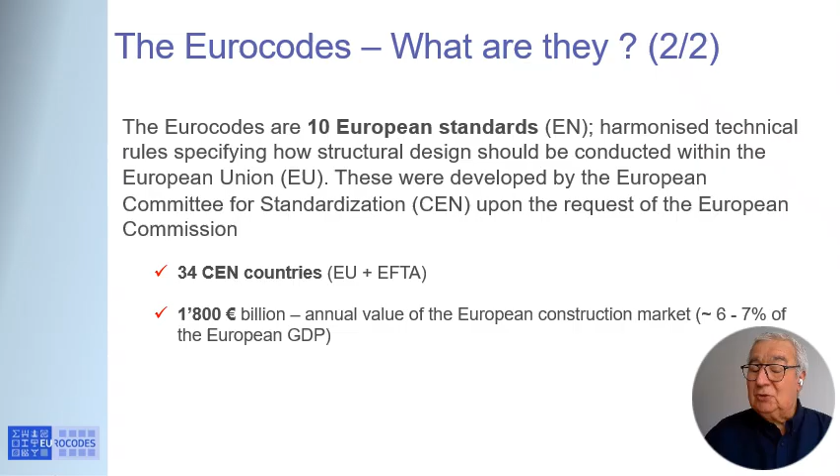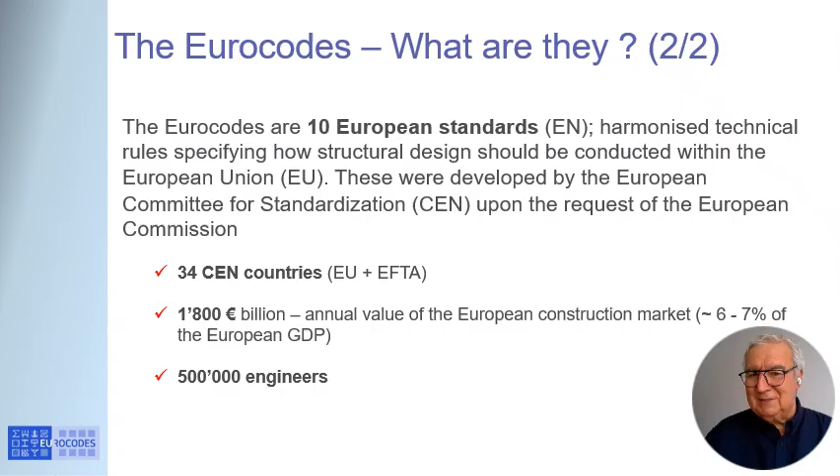There is 1.8 trillion annual value of the European construction market, which is 6-7% of the European GDP, gross domestic product, and there are, this is very important for us, 500,000 engineers involved with the Eurocodes.

If you go to be more structured, here you have the 10 standards. The first one is the structural safety, basis of design, where you deal with structural safety, serviceability, and durability of structures.

We go to the second level, which is the actions on structures. The loading standard is EN 1991.

After that you have a set of material codes, and it goes from concrete, steel, concrete composite structures, timber, masonry, and aluminium. These are the standards for design and detailing of these materials.

And finally, you have two more codes. One is for geotechnical design, which is 1997, and the Eurocode for seismic design, this one, which is 1998. This completes the set of these 10 standards, the Eurocodes, and yes, that's all.

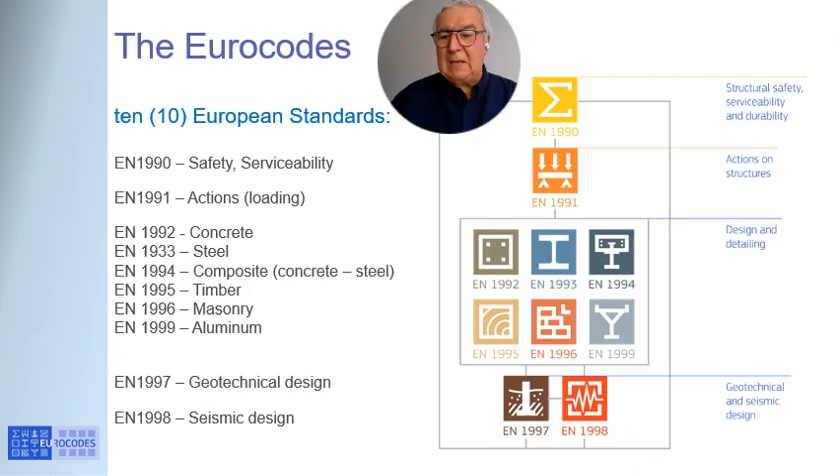Let me show you a little bit of this problem of applying a code in a vast region. I mean, how can you apply the Eurocodes in Europe? In the north, you have snow, too much snow. In the south, it's very hot, the temperature is very high. Africa is there, there are strong winds in one part, the others not too much. How can you cope with this diversity in terms of geography, in terms of climate, and in terms of geological conditions? In the north there are not too many earthquakes.

In the south, there are. Greece, Italy, Portugal, you see, there are earthquakes a lot. And how do you cope with the difference in seismicity in the different parts of Europe.

The solution was very intelligent, very clever in my opinion. It was to create these nationally determined parameters, which can adjust the conditions of the countries of the region. And we put all this together in the so-called national annex. Each country has a national annex for the Eurocode, for each code, and it goes like this.

Another important aspect is that the Eurocodes have a modular structure. You have seen these 10 standards very well separated. This modularity gives the possibility for the installation or adoption of the Eurocodes progressively. This is a very important thing also, the possibility of implementing even parts of the standard very progressively.

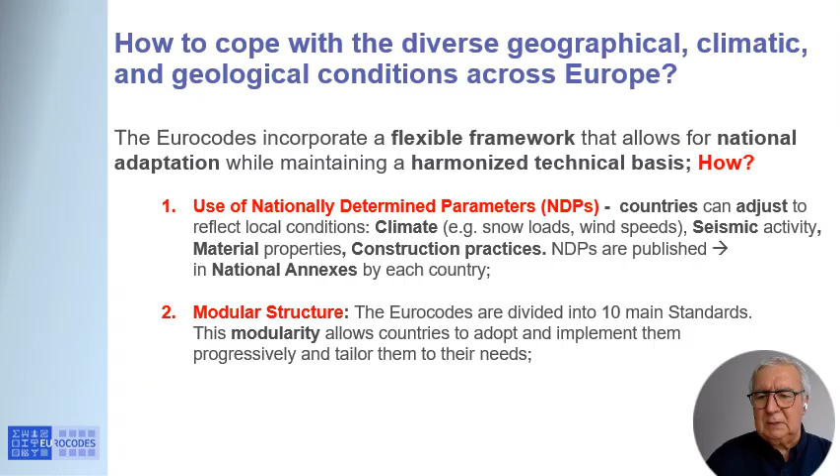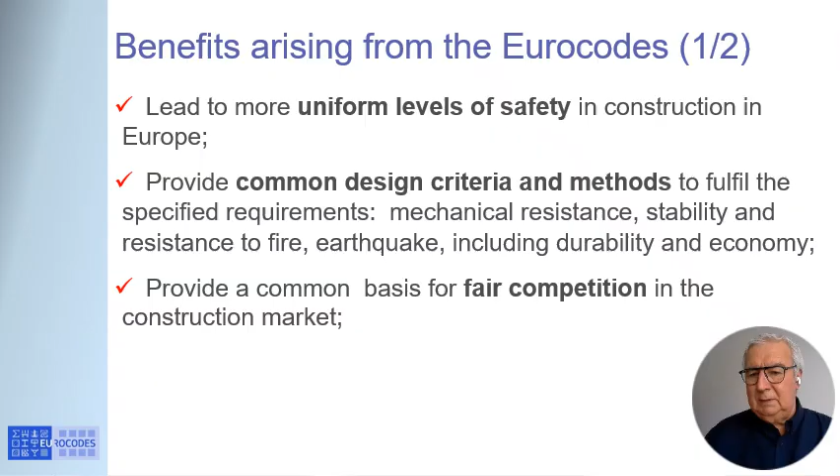Arising from the Eurocodes, uniform levels of safety in Europe. This is very important: common criteria, design criteria and methods, for design, for fire, for earthquake, durability and economy, and they create a basis for fair competition between the different firms in Europe in the construction market.

We could really be more specific here. Competitiveness between whom? Between engineering firms, contractors, designers, manufacturers, product manufacturers in their worldwide activities also, not only in Europe. And another important thing is that they provide the common basis for research and development.

Nowadays a project in Europe, if it is in this area, has a reference to the Eurocodes. This will have an impact in the Eurocodes in the second generation or even in the third generation. We have to have a vision always to put the results of the research into code practice, in a short or even long term.

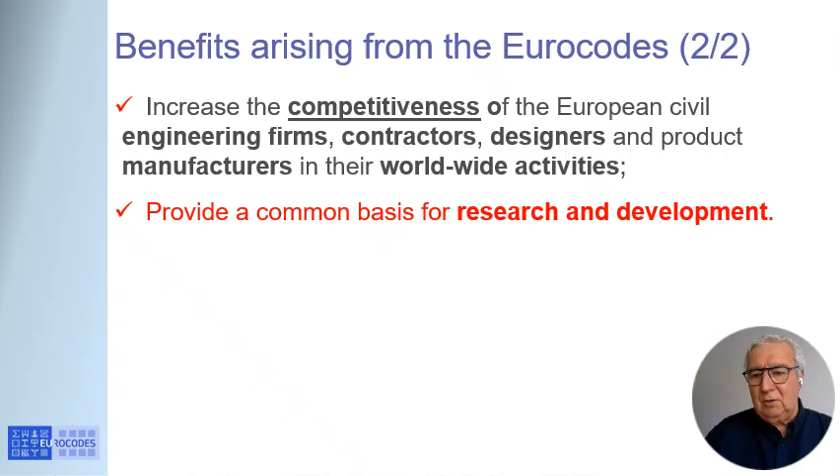Let me go to the second point of my presentation, about the European legislation and standardization system. Here you have the representation of the ecosystem for legislation and standardization. It's a bit complex, but I will try to simplify it.

Let us start with the legislation, the part of authority. You have the European Commission on top, the European government, and in the left column you have the European member states. They get together and sit in the Standing Committee on Construction, and they decide what are the objectives of the legislation, what kind of legislation is needed at the European level, and afterwards coordinate with the countries how to implement this legislation at the national level.

This is the authority, the legislation part, and afterwards comes the second block, this green one, which develops the standards, develops the codes. This is the CEN that coordinates this part. CEN is the European Standardization Body, and together with them all the national standardization bodies, as you see here in the column.

They communicate this legislation—this standardization communicates with the legislation. There is a channel of communication, and at the top you see these arrows. There is a very official communication: the Commission asks for standards, the CEN develops them and comes back saying if it corresponds to the requirements.

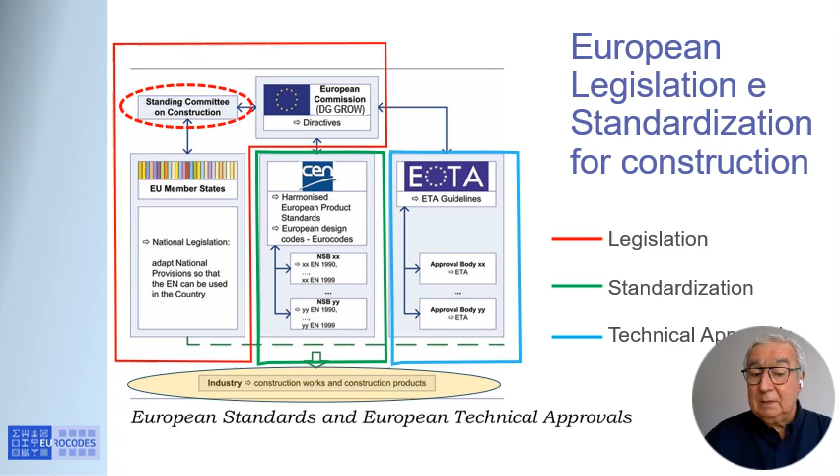Who benefits from this? The European industry. This is clear. There is the benefit of this system here.

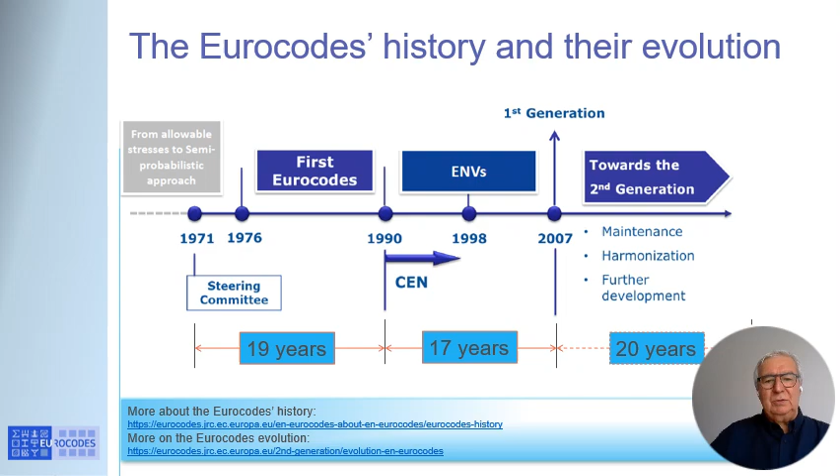Information about the Eurocodes, the history and evolution, etc., can be found on these platforms. Let us go to the duties of this implementation.

This could be useful also for you, for the model code. After its development, we have to transfer it to the national codes. There was a period of 2 years for the countries to set down their national determined parameters. There is a need to publish the national standard transposing the European part and national annex, clearly. There was the need to adapt the national provisions in order to allow the application of the Eurocode in their territory, and afterwards there is the need to withdraw all conflicting national standards.

You see there, March 2010 for the first generation was this date, and afterwards you need to promote the codes and training community in the application of the codes.

The Joint Research Center of the European Commission has been mandated to help in this operation: develop and collect manuals, design aids, support national implementation, international promotion, development, and coordination of research for the second generation. We started there, and at that time created the website for the Eurocodes, Eurocodes Building the Future, which is still there, perhaps with another design, but it's still there.

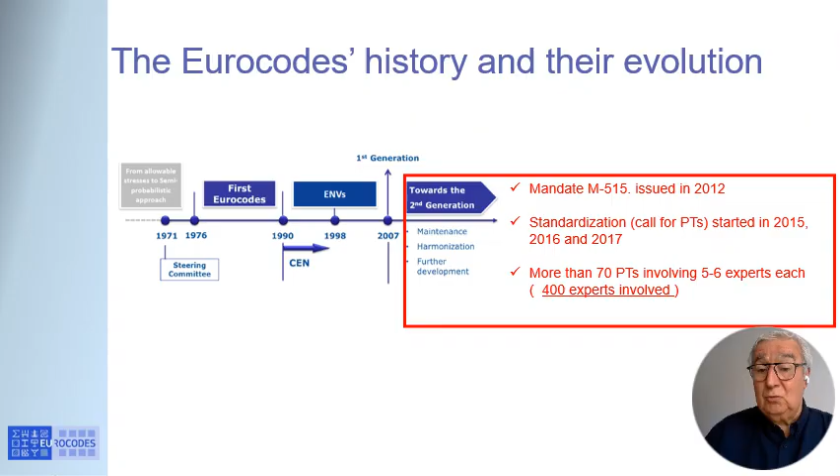The work started in 2015, and there were more than 400 experts, European and even external, not European, involved in this work. We are now in 2026, and the second generation is already there, published in Brussels centrally, and now the countries will have 2 years, till 2028, for the application. That is the date of withdrawal: they have to withdraw the old version of the Eurocodes in 2028 and adopt the new version.

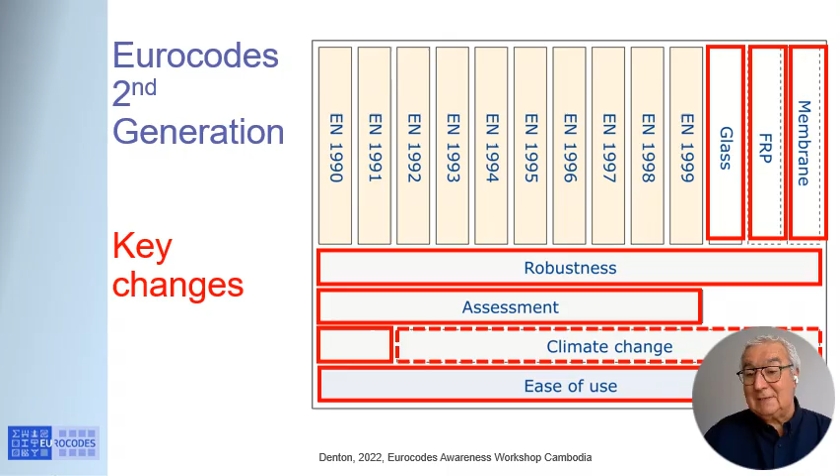What has been done in general: it has considered robustness, assessment of existing structures, climate change, and ease of use. You know, when you start a standard, sometimes you have the wish to include everything, and it's not the best way for design. We have also considered new material codes for glass, fiber reinforced polymers (FRP), and membrane structures, and at the end of the day, you have to uptake the new knowledge and technological developments.

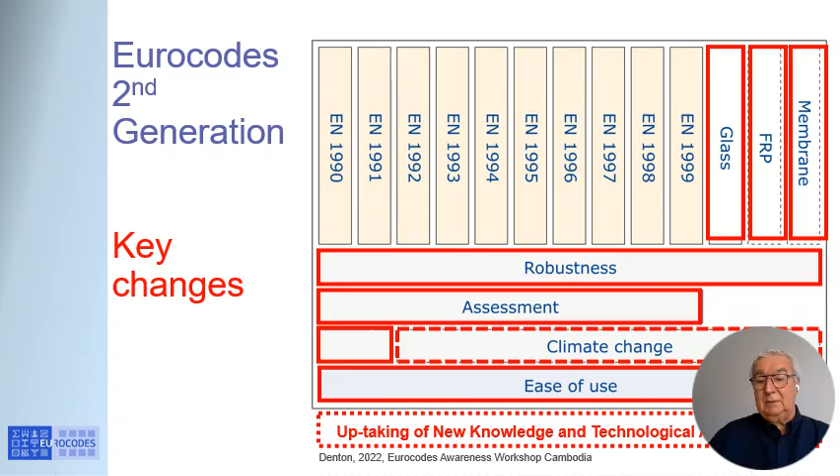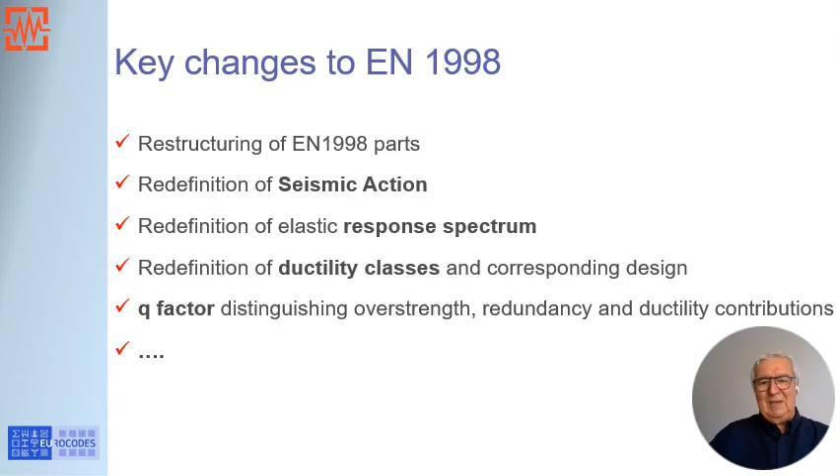This is what concerns the second generation. Let me come down more specifically to Eurocode 8, and here is what has been done for Eurocode 8 in the second generation. Very rapidly: restructuring of the parts, redefinition of the seismic action, redefinition of the elastic response spectrum, redefinition of the ductility classes and corresponding design, and also the q factor, which is the strength reduction factor. There are some important modifications there.

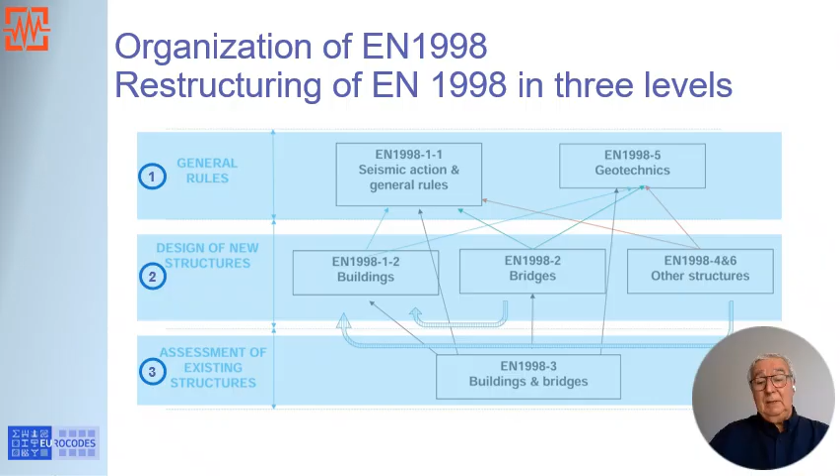The restructuring gave rise to this schematic representation where you have general rules, rules for new structures, and Part 3, for assessment of existing structures and redesign.

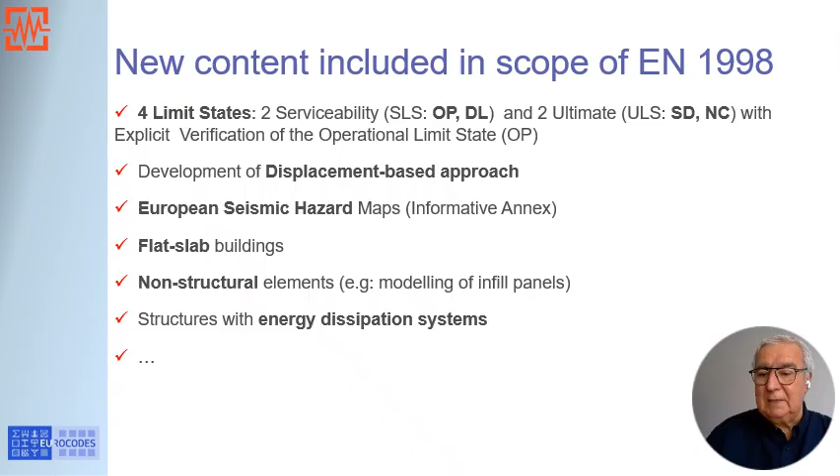Let me come to the seismic action, because here there was a modification. Nowadays the spectrum is defined with two anchored points: one is the spectral value at maximum amplification, S alpha, and the other is S beta, which is the spectral amplification at 1 second. 1 second is another anchored point because it marks the transition between flexible structures and more rigid structures.

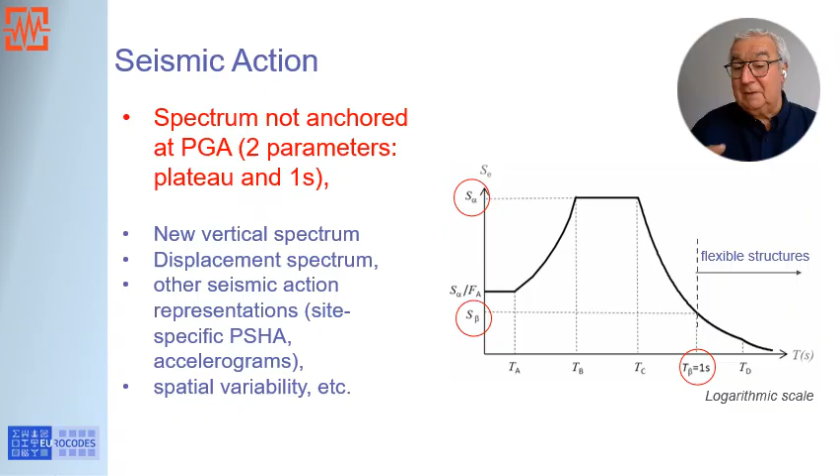This is the representation in a logarithm scale, but here with these 3 data points, we can define the response spectra, with the corner periods TA, TB, TC, TD, which come out as a nationally determined parameter. Countries can adapt this code to the region, touching even the corner periods in the response spectrum.

Here you have the maps of the S alpha values for a return period of 475 years, which corresponds to 10% exceedance probability in 50 years. This is the normal life considered for in Europe, and this was obtained within a project, the SERA project, financed by the European Commission. The Commission finances a project which is relevant for the Eurocodes.

And here you have the outcome, S alpha and also S beta, for all Europe.

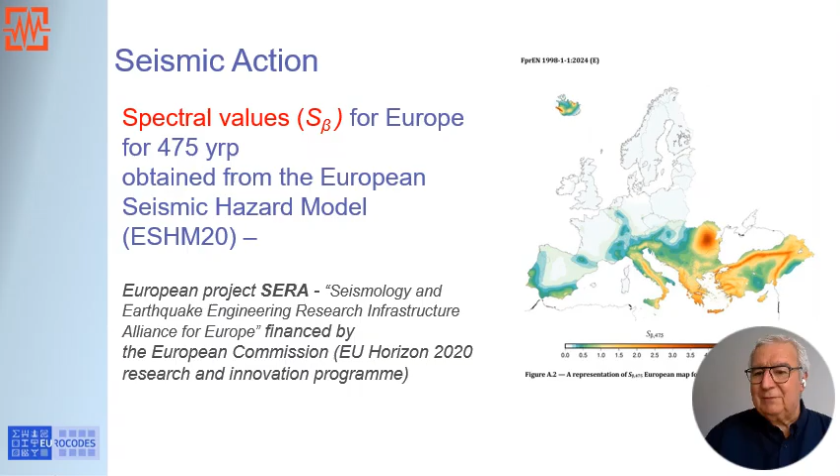There is another point, which is the consideration of seismic action classes. In the second generation, we take into account not only the seismic intensity, but also the consequence classes, the type of structure that we are designing.

With that, we define classes of structures, which are a little bit dynamic in terms. They change with the importance class, since we already consider in the seismic action the importance of the structure when defining these seismic classes. This helps in concentrating your efforts in where you should concentrate. If the structure is located in a high seismic action class, it should be important, the structure, and also the seismic intensity is important.

Pay attention to these structures, and if you are in a zone where the seismic action is very low, the structure is not important, don't worry about importance, and perhaps you don't need to have a seismic design of this structure.

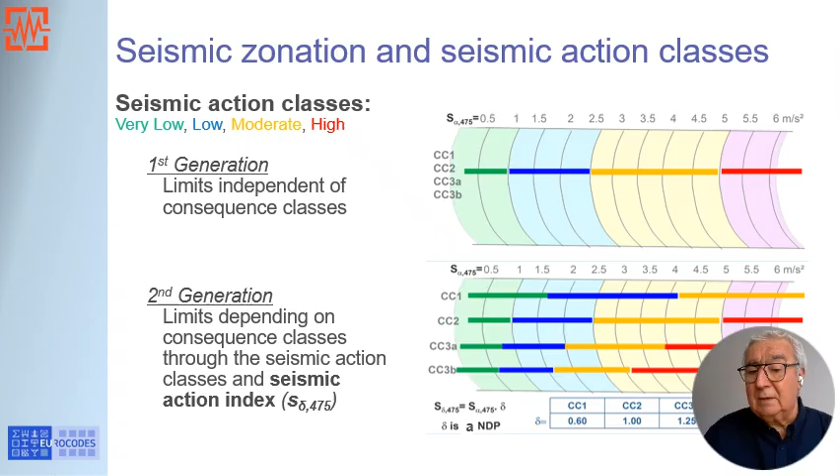Important thing is ductility class, they were changed, but one thing that is important to underline here is that we have reduced the strength reduction factors, the Q factors.

Why? Because of this damage limitation. We have seen in the earthquakes in the past, Northridge, Kobe, etc., that most of the new buildings stayed there, they didn't collapse, but they were completely damaged, they had to be demolished. The intensity of the non-linear deformation is too much, and they have to be demolished. This has consequences, economical, social, etc.

The tendency here is to reduce the Q factor, to explore less ductility, to have stronger structures in order to explore less ductility.

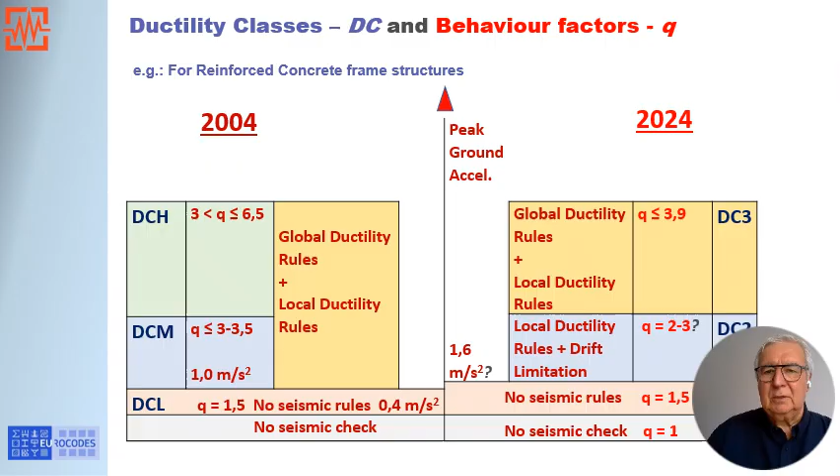Here you have the four limit states, the verifications, the performance-based design. For performance-based design: operational limit state, damage limitation. Here you have the famous damage limitation.

The significant damage, and this is the point that is the ultimate limit state for new structures.

And you have also the non-collapse, which serves essentially for existing structures. For existing structures, you should go to the non-collapse limit state.

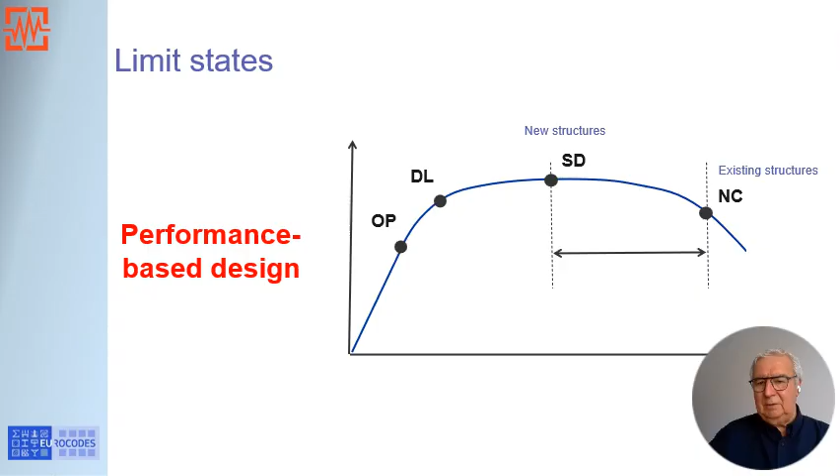The matrix is here, the performance-based design objectives matrix, and you see here the relation between the performance level, the seismic intensity level, and the performance level for the Eurocodes presently.

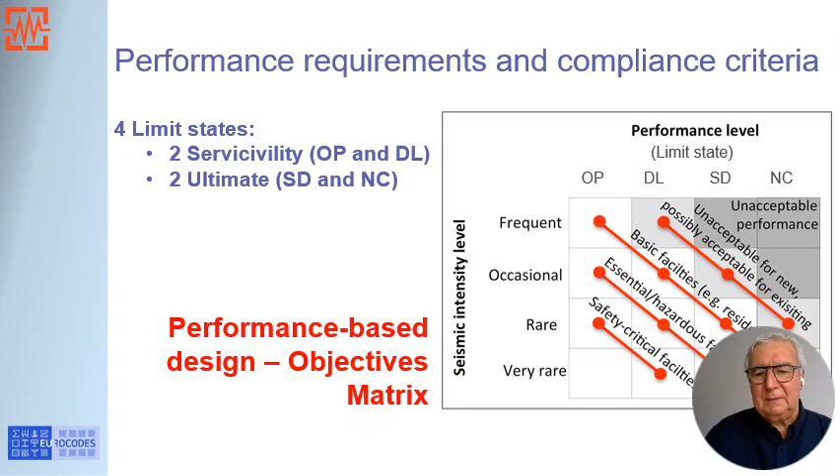The second generation is there, and what you have seen is that we have seen an engagement even of the European Association for Earthquake Engineering, in this case for Eurocode 8.

They have created webinars on the new Eurocode 8, the second generation. This is open information you can access, and there is everything about the second generation that you can see on the website here.

Research and innovation, and I'm in the last part of my presentation to show you how this development of the Eurocodes gave rise to lots of work, lots of research in Europe, and brought the research community together. This is very important because we have created an objective. Everybody is looking at the European standard and referring to it. This creates some momentum even in the research community and in the technical community, clearly.

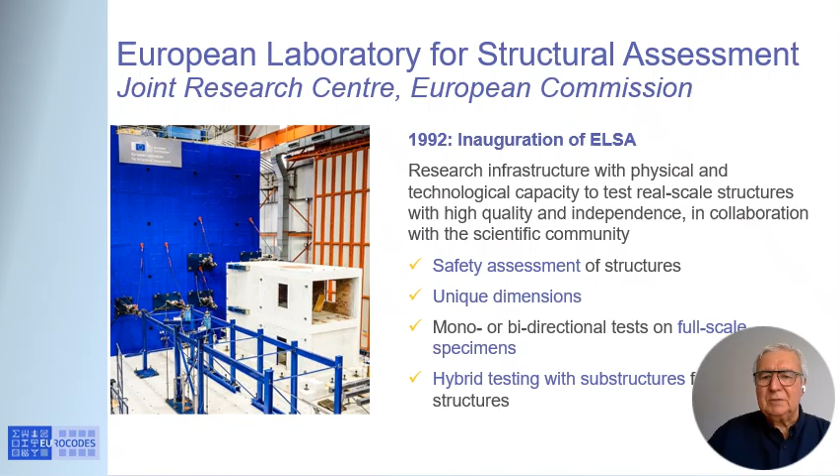This is our laboratory in Italy. The laboratory of the European Commission Joint Research Center has already done lots of work. But you see here some examples. This was the first structure designed to the Eurocodes in the years 1994, 95.

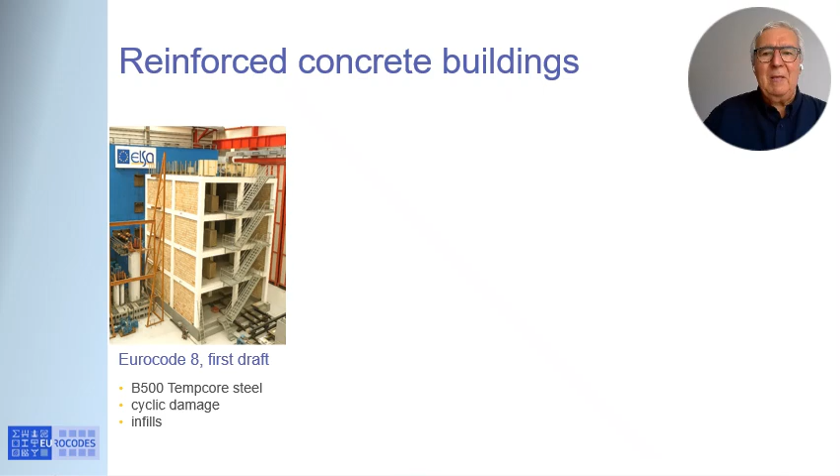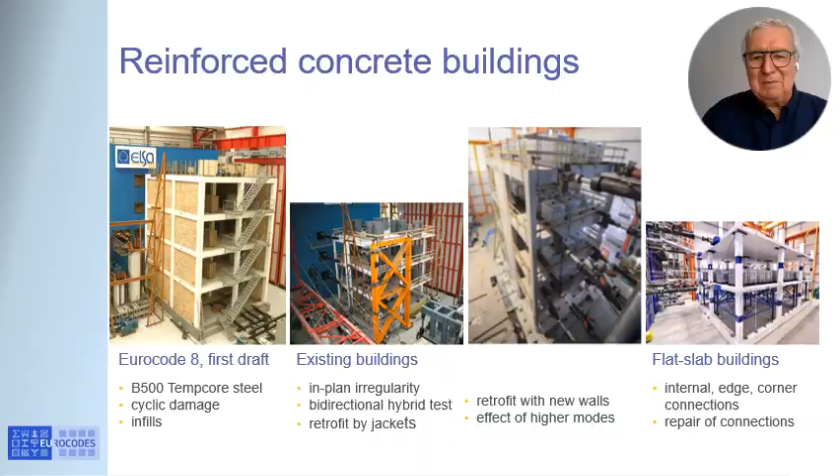Existing structures, reinforcement retrofit using shear walls, flat slab buildings. Today you have it in the second generation, but the work started there a few years ago at our lab. I have here

also some work that we are performing on sustainability of building renovation, sustainability renovation in Europe, which considers integrating the earthquake and energy renovation at the same time. And we are also looking at modular, innovative solutions like modular construction and new sustainable materials for construction.

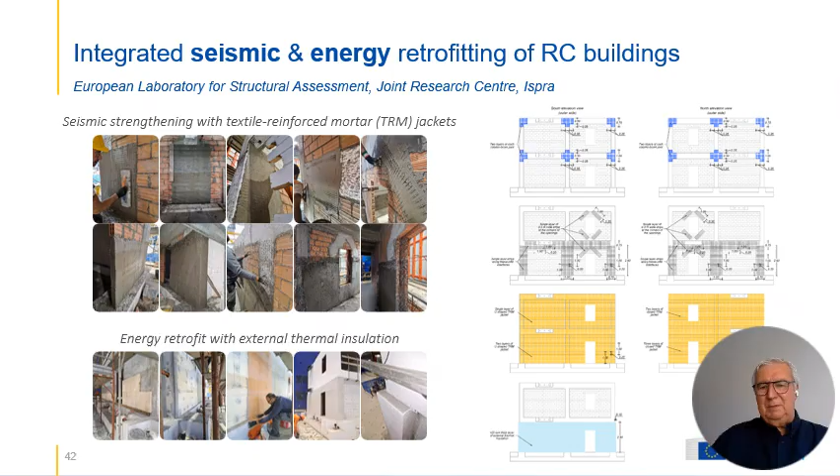Here you have the case of energy and seismic retrofitting, shotcrete with textile reinforced mortar for the seismic reinforcement, and afterwards application of the insulation material. And with this we address the two problems: seismic performance and the energy performance of the buildings. This is very popular today in Europe because of the energy crisis and so on.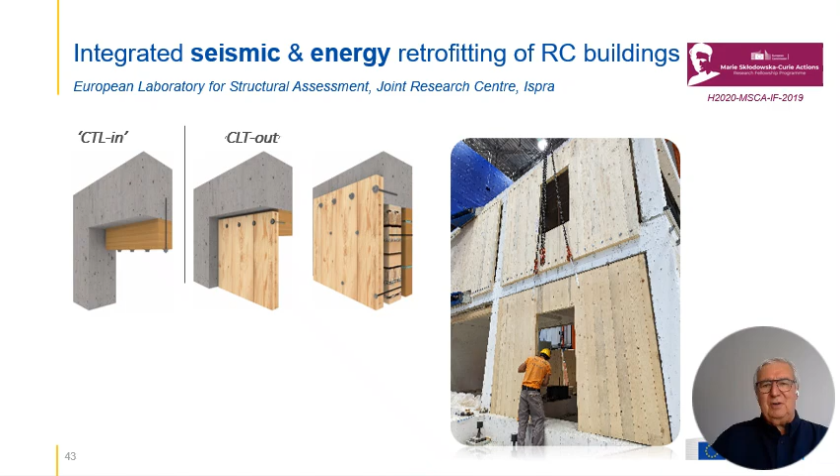And here you have another case where we replaced the infill walls because they were degraded or whatever, and we replaced them with new walls. In this case, it's cross-laminated timber walls with dissipation characteristics or not, but also with energy performance characteristics, not only to reinforce for earthquakes, but to reinforce also for energy performance testing.